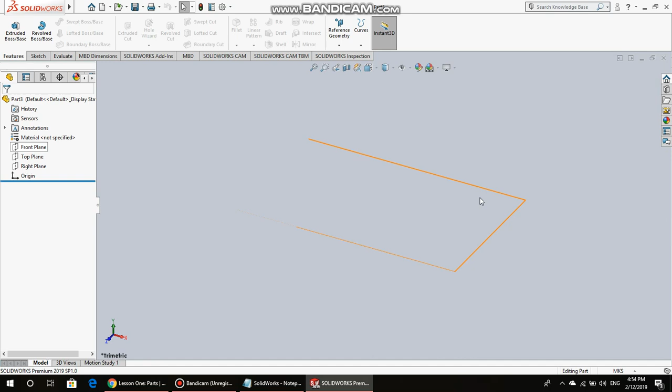Here we have started the program, and in order to start drawing, we created a part. The first thing that appears here is the sketch tool and the features tool. We're gonna go to the features tool and press Extruded Boss Base. We're gonna choose a boss face or a boss plane that we're gonna focus on.

We're gonna choose the front plane, it's the easiest one. Then it's automatically moved to the sketch part. Here we're gonna choose the rectangle tool to draw a rectangle.

We're gonna put it on the origin and draw. Our drawing today has a rectangle, so I am using a rectangle. You can see it after finishing the video. I wish you enjoy. Okay, we have drawn the rectangle.

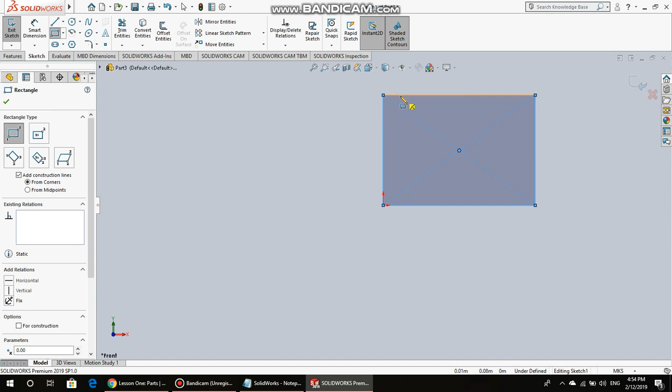Now we're gonna determine its dimensions. We can determine it, for example 120 millimeters, using our mouse only, with something named the Smart Dimension. We press on the side, move it up, press again, and choose the dimension that we want. We're gonna choose 120 millimeters.

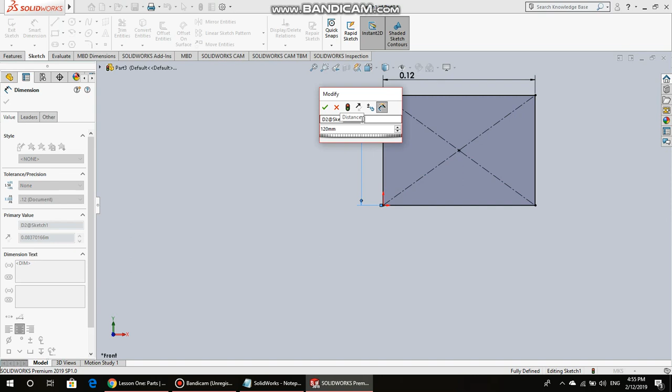And for this side also it's 120 millimeters. Okay, see what happened now, the drawing goes up so we can't see it properly. So there's something SolidWorks does called Zoom to Fit, or we can press F. We press Zoom to Fit, so the drawing comes to the middle of our screen so we can see it properly again. That's great.

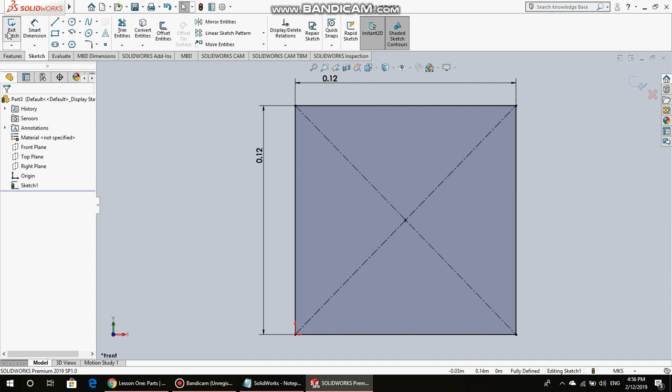Then, in order to turn this rectangle, or this square, into a 3D view, we're gonna first apply our changes by pressing this green mark, and then pressing Exit Sketch. After pressing Exit Sketch, we're gonna choose a depth for this cube. Then it's now a cube.

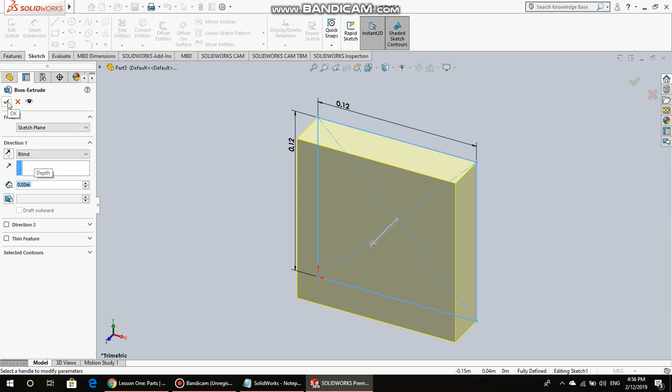We're gonna choose a 30 millimeter depth. Now we're gonna apply the changes, and our 3D view is ready to use, ready to continue.

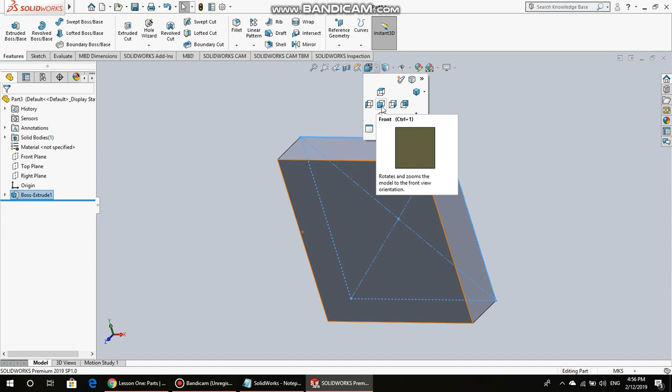Okay, we're gonna show you something before continuing. It is this view orientation. You can press on it. There's 9 views that we can use in order to view our drawing, our design.

We're gonna view from the front, from up, or from the right, you know, anyone, or you can view it isometric. The isometric is the best way to view a 3D view, or we can go up, down, and front, or just 2D. But we're gonna use them later.

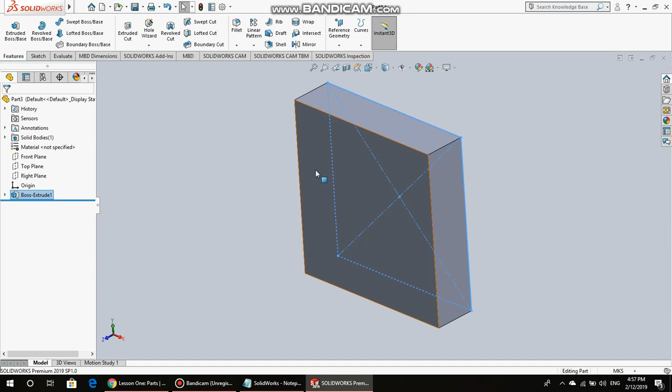Now we're gonna press on the front face because we're gonna add something into the front face. So we're gonna make it the Extruded Boss Base. Press on it, then press Extruded Boss Base, and it automatically switches into the sketch tool. Then we're gonna change into the front view so we can draw.

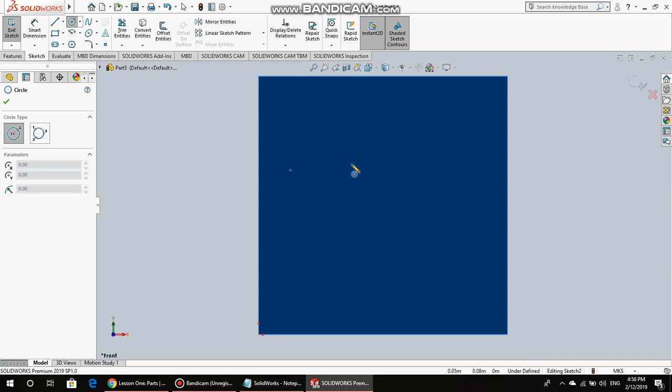Yes, we're gonna draw a cylinder on this rectangle, this square, so the drawing will be more pretty. Press here, tap here, and draw the circle.

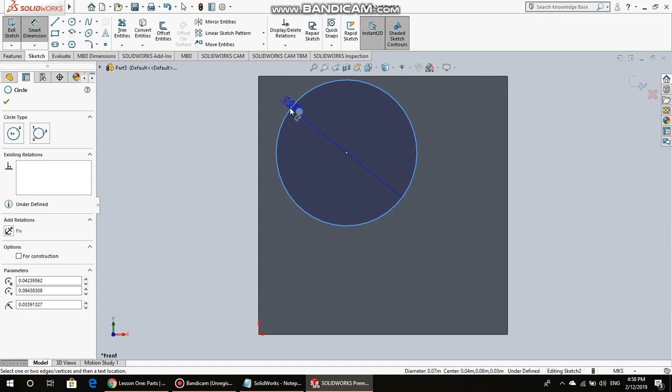Here the circle is drawn, but its dimensions are wrong, and it's not in the middle, it's far away from the middle. So we're gonna use the Smart Dimension in order to first determine its diameter. We press on the circle and then move outside. We're gonna choose a diameter of 70 millimeters.

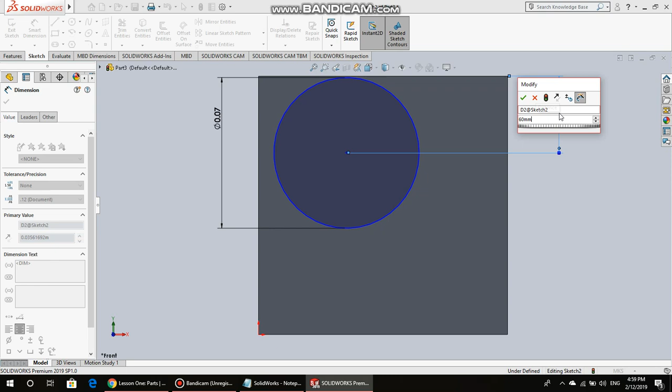Now before applying, we're gonna put it in the middle of the square. Tap here, also in the Smart Dimension, then tap at the top here, and since the side is 120 millimeters, we choose 60 millimeters to be in the middle. Then we tap the circle also in the Smart Dimension, tap here, and choose 60 millimeters again, so it's 100% in the middle. Now we can just apply the changes, and you can see here it's fully defined.

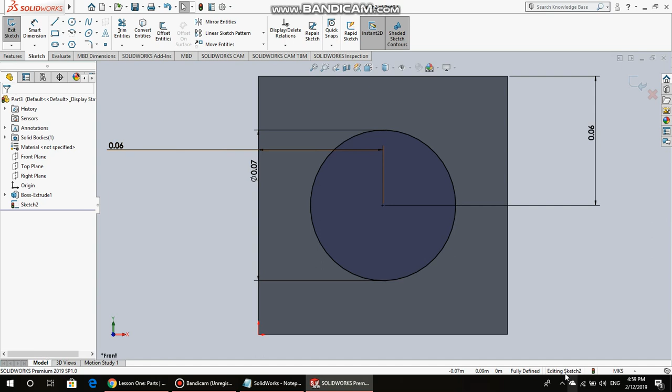So when both the circle and the square become fully black, it's fully defined, and we can exit the sketch. After exiting, we choose the depth of the cylinder at 25 millimeters, and this part of our drawing is done.

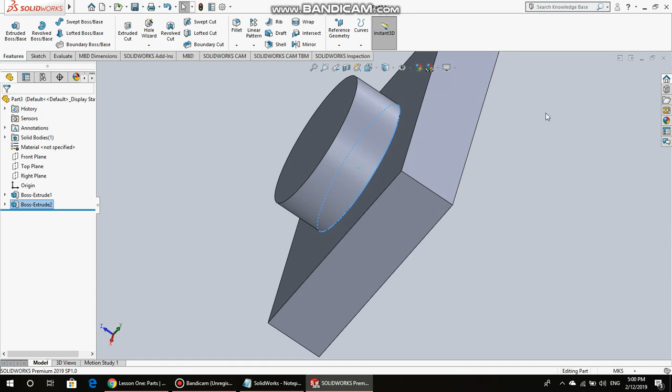We can make it like this. We can move in 3D by pressing on the roll of the mouse—I call it a roll—and move the screen so we can see it in 3D. I'm going to zoom to fit and try to make it isometric.

We're going to continue drawing our design. Now we're going to learn how to use the extruded cut. It's used for cutting a hole.

Sorry for going, but my friend just came and started talking to me.

In order to move to the next step, we're going to use something called extruded cut. It's used for cutting a hole in the middle of the face we choose. We now choose the cylinder in the middle, press extruded cut, and choose the face we're going to work on—the front face.

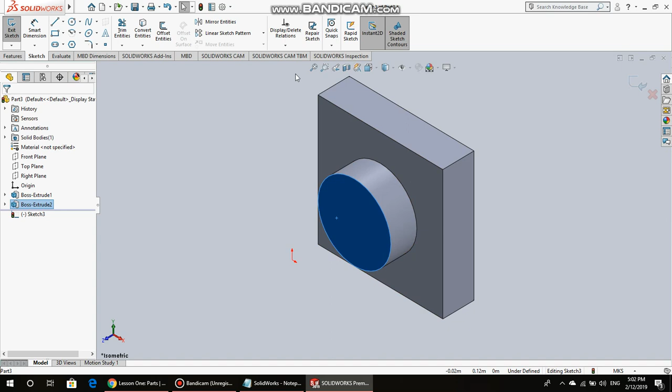Press here, press twice so it turns blue. When it's blue, it's good to go on the front face, and we're going to make a hole using the circle tool. I'm pressing the circle tool and moving to draw.

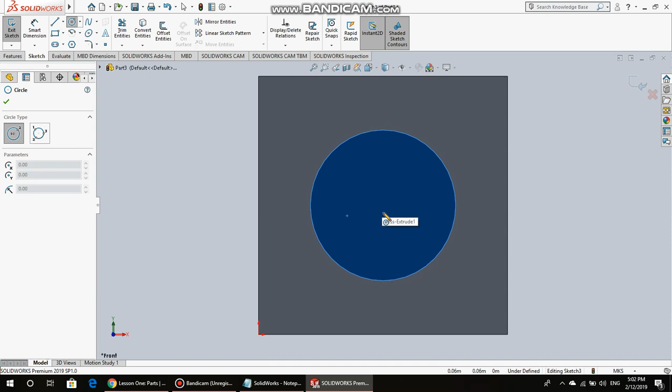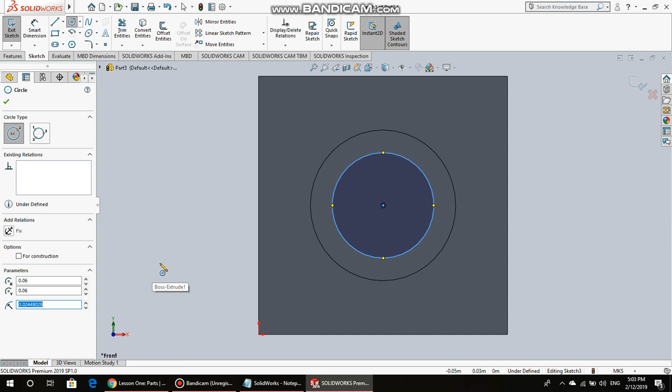The center is automatically determined. We're going to draw our circle here, and we must choose its diameter. We apply the changes, and using the smart dimension, we determine its diameter. We choose 50 millimeters.

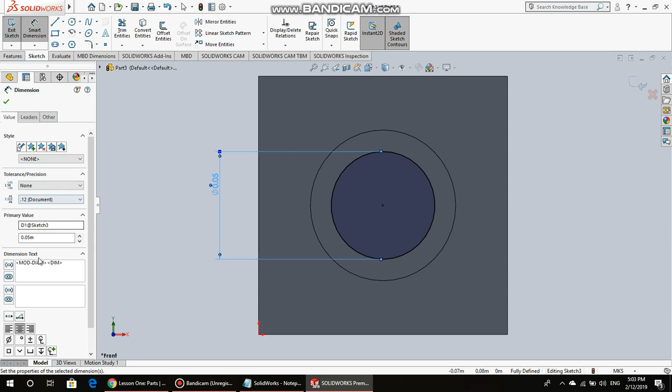We apply the changes and then exit the sketch. Now we apply the changes and exit the sketch, but this time we choose a through-all option, because blind means it's above

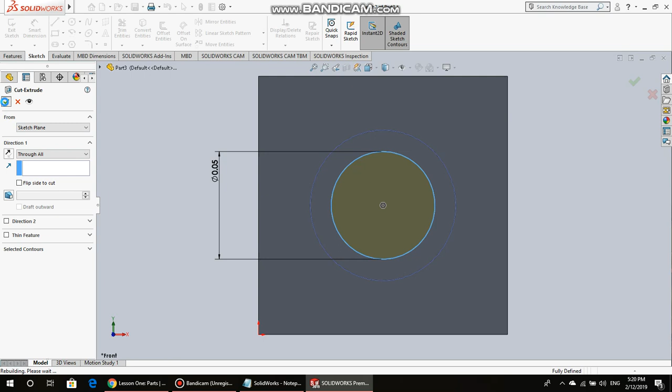the original cylinder, the cylinder we already drew. Through all means it's a hole—we are cutting a hole. We apply the changes, and now you can see the hole I talked about. There it is.

We're going to change the view to isometric, and two things are left for finishing our job: the fillet tool. We're going to make fillets—fillets are curving these sides until they are not sharp anymore.

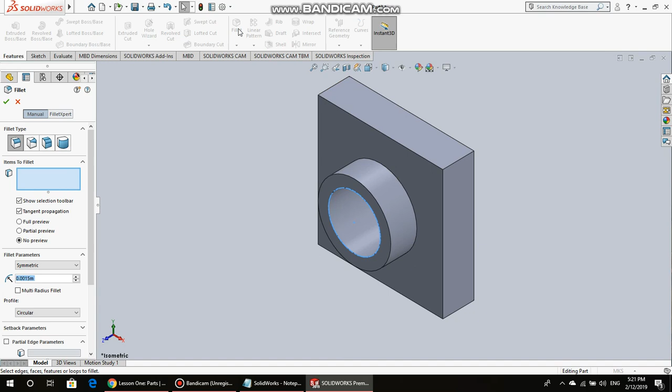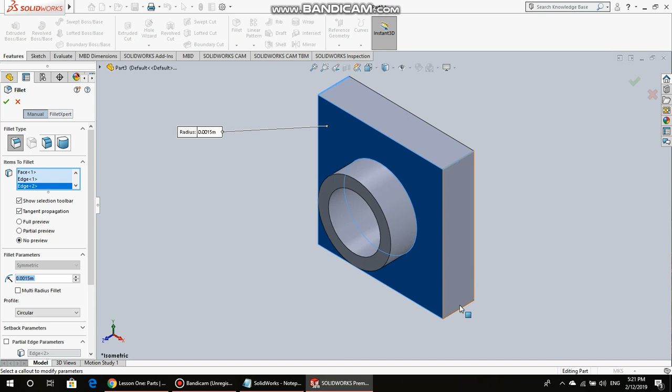To do this, we click the fillet tool and select the front face we want to fillet. We also need to make these four corner edges fillets, so we press them alone—being careful to select them alone, not the whole face. One left, down, here it is.

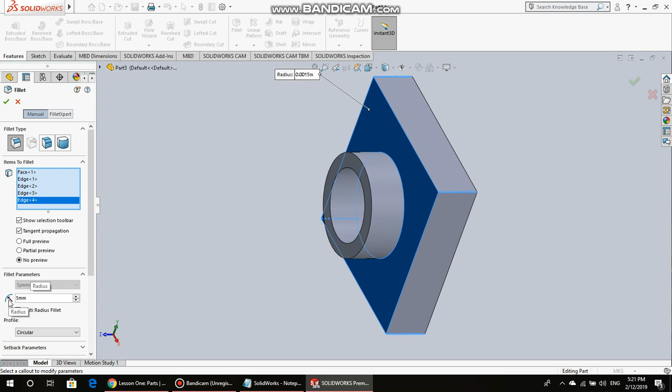We're going to choose a radius of 5 millimeters and apply the changes. Here is what I meant with fillets: the sides, or edges, or even the face, are not sharp anymore.

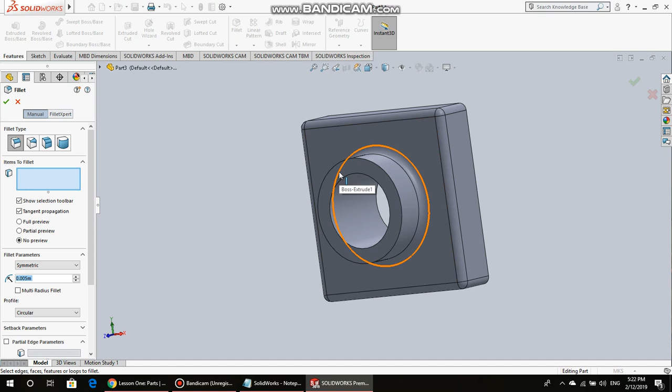We're going to make a fillet as well for this front face of the cylinder. Press here and choose a radius of 1.5 millimeters. Press apply, and it's filleted.

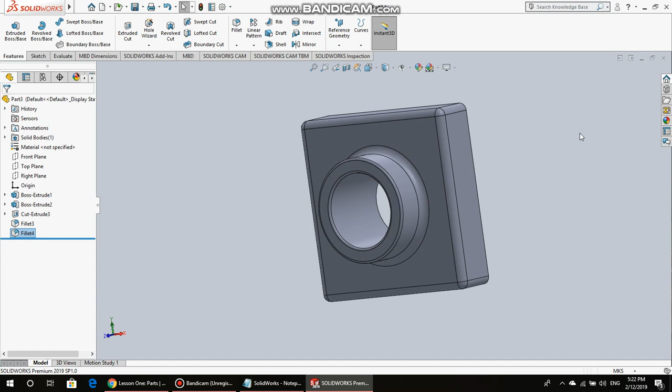The last thing we're going to make is a shell. Do you know what a shell is? It's a big gap or hole we make within the face until the last face—you'll see what I mean.

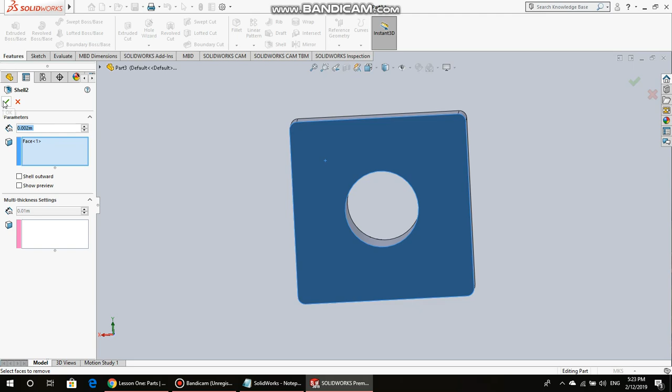We're going to make a shell in the back of this design. Press on the back, press shell, then choose a parameter of 2 millimeters, and accept this. This is a shell—that's what I meant.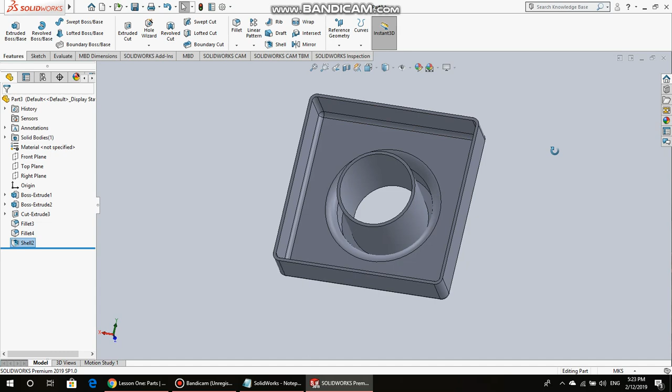Also, the fillets are applied on the inner face of the front face we worked on—it's also inside. It's a pretty good and nice design of an object, of a solid.

Our job is finished now. This is a good exercise and good training for you beginners in Solidworks to work on.